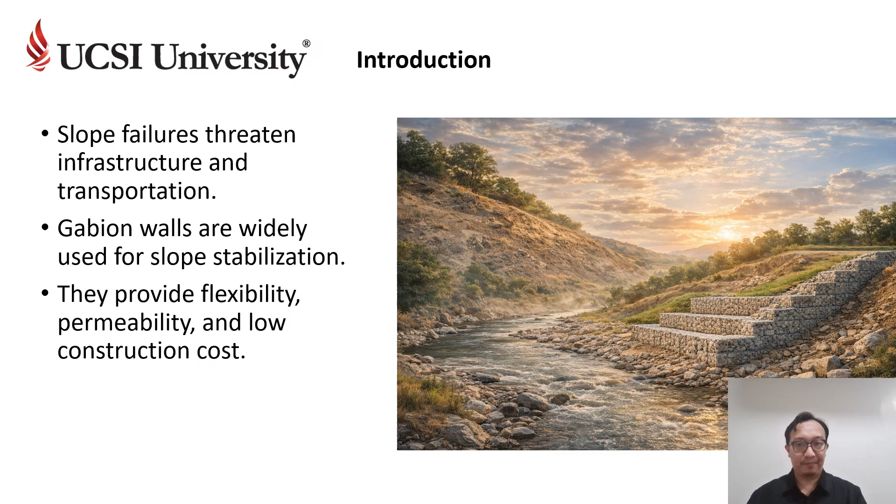Let's go a little bit further about what factors affect slope stability. Basically, slope stability can be affected due to natural factors. Number one, soil types. Each soil type can produce what we say is strength. Different soil, different strength - different types of soil composition can produce different strength. So by understanding the composition of the soil component itself, whether it's the percentage of sand, silt, clay, and gravel, we can know the strength and stability of the slope.

That's number one. Number two, the component of the slope itself might contain rocks. If the rock has high fracture, it can potentially reduce the strength of the slope. If the rock has high quality, high strength, that could also strengthen the slope itself.

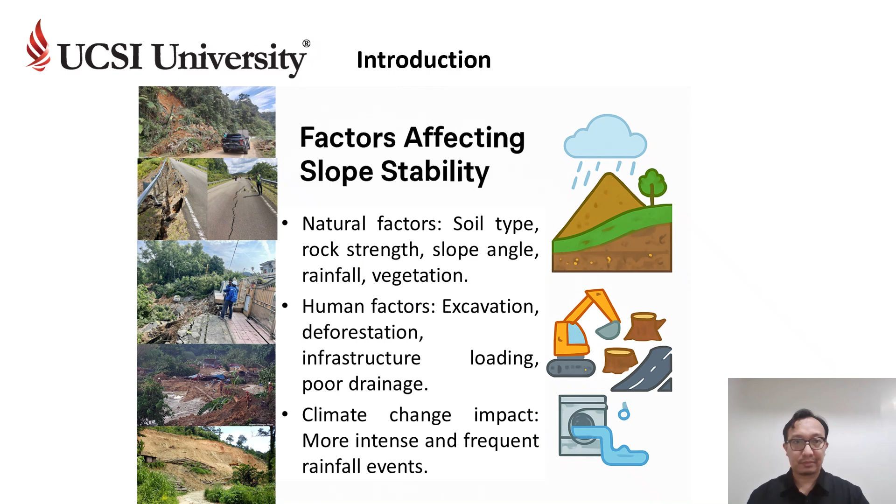So in this study, there are four objectives that I'm going to list out here. Number one, of course, when we conduct the study about slope stability, what we look into is to evaluate the factor of safety where we do the analysis based on the gabion walls.

Number two is to assess the effect of material type. Basically in this study, we are using three to four types of material, fill material for the gabion wall, to look at whether the factor of safety is high or low.

And number three, to assess the saturation condition, also based on the wall geometry. And of course, in this objective, we are using the Morgenstern-Price limit equilibrium method to assess the stability of the slope. Why am I using Morgenstern-Price?

Basically, it is one of the most common approaches for the design. Instead of Bishop - Bishop is also one of the methods that can be used to assess the stability of the slope - however, Morgenstern-Price is also one of the most commonly used methods. I hope the viewers can take this as part of their knowledge, so that maybe you can utilize this method for slope stability analysis.

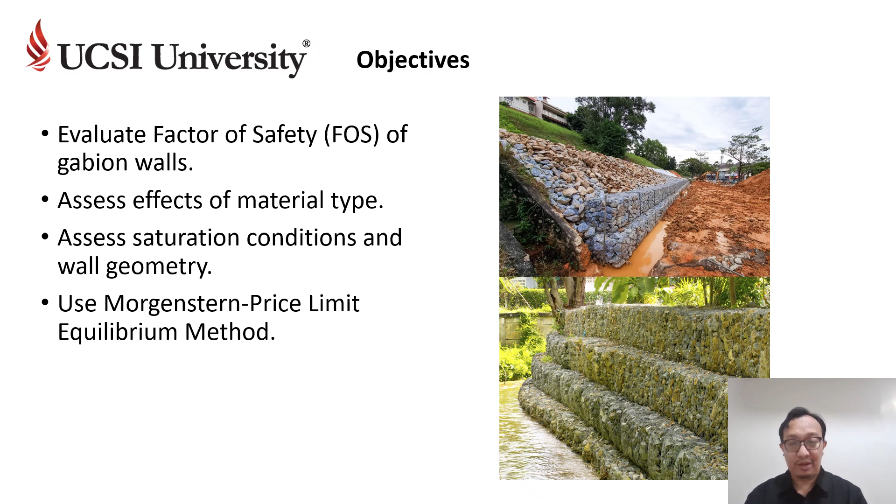Let me explain about the Gabion walls and why we focus this study on them. Number one, one of the purposes is to stabilize slopes and prevent erosion, and also to reduce landslides in loose or unstable soil, so that it can protect infrastructures, especially in urban areas, and prevent erosion, especially for stream banks. The function of the Gabion wall is a wire mesh cage filled with rocks that allows water to pass through, reducing hydrostatic pressure and improving slope stability.

If you're familiar with the Gabion wall, you can see that most of them are normally constructed on the riverbank or stream, since we know the function of the Gabion wall is to allow water to pass through and reduce hydrostatic pressure. That's why we can see many Gabion walls constructed in the area of the riverbank or stream bank.

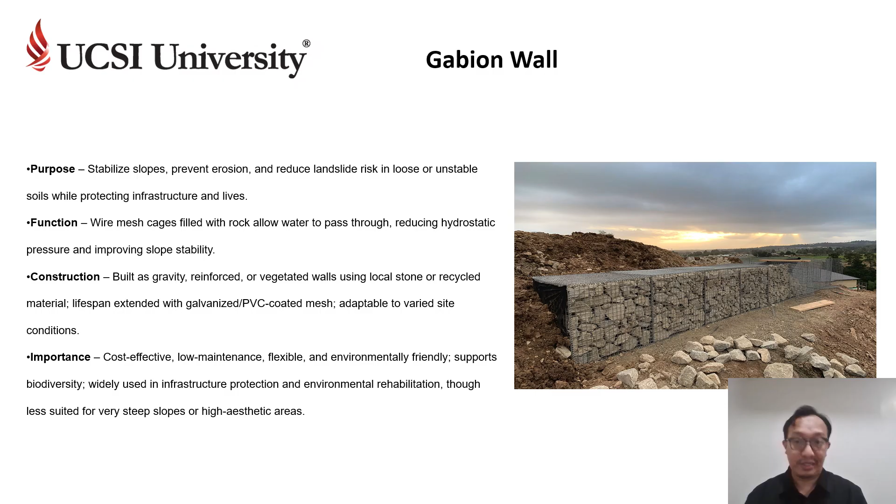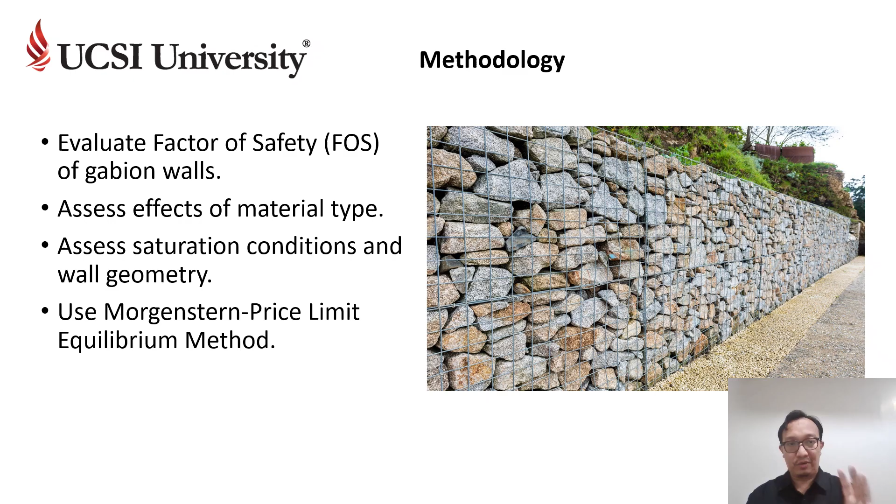In this study, what we do is evaluate the factor of safety. We assess the saturation condition, assess the effect of material type, and use the Morgenstern-Price method. Like I mentioned earlier in the objectives, we focus on these four processes.

Behind the Gabion wall, you must have what we call the backfill. For the backfill, for the bottom material, we are using soil properties with unit weight 15 kilonewton, cohesion 4 kilonewton, and friction angle 12 degrees.

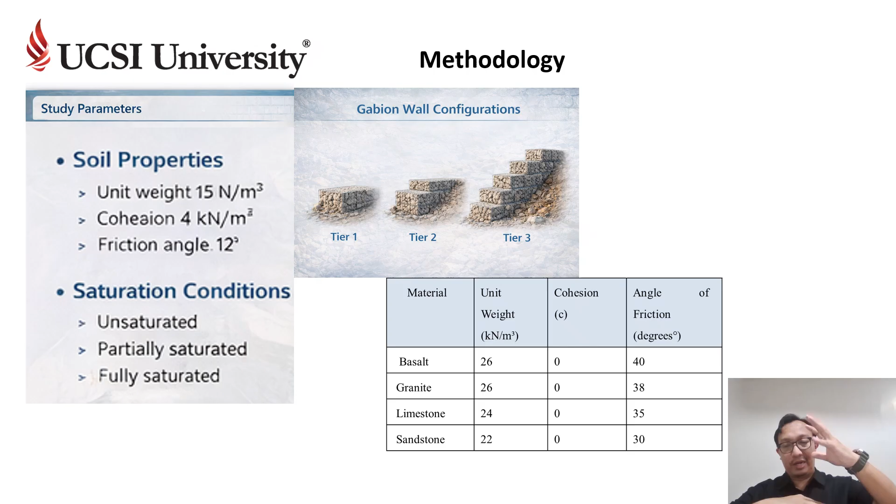We evaluate the Gabion wall configuration, having 1 tier, 2 tiers, and 3 tiers. These tiers mean the stack of Gabion cages. In one case, you put one cage, we call it tier 1. You put a second cage, we call it 2 tiers.

Another case is 3 tiers, but we can play around with the configuration. Maybe 2 tiers with 2 cages and 1 on top, or maybe 3 cages, 2 tiers, another 2 on top, and then another 1 to make it 3 tiers. This is the wall configuration that we focus on.

We also look at whether the Gabion wall is stable under unsaturated conditions, where the water table is below the ground; partially saturated, where the water is maybe half or a quarter of the Gabion wall height; and fully saturated, where the water table is high.

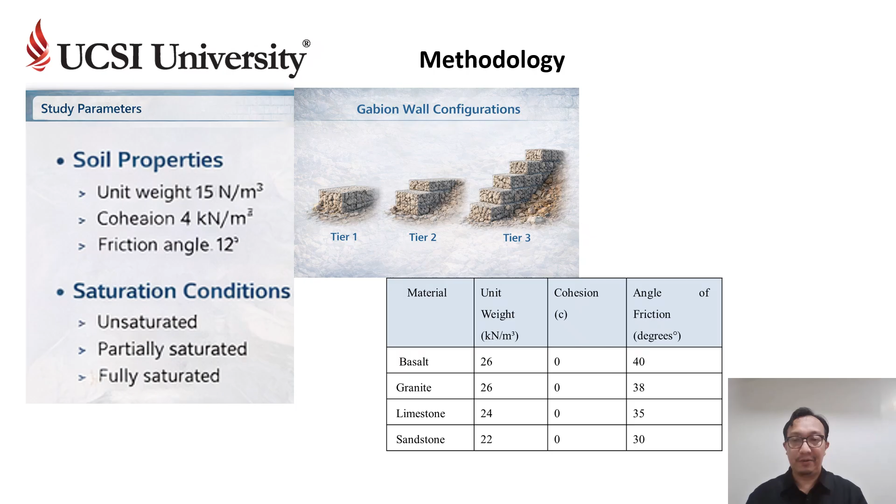For the fill material, we are using basalt, granite, limestone, and sandstone, with the unit weight, cohesion, and friction angle as listed in this slide. We try to evaluate which types of rock can provide more stable, more efficient, and more effective results for Gabion wall stability.

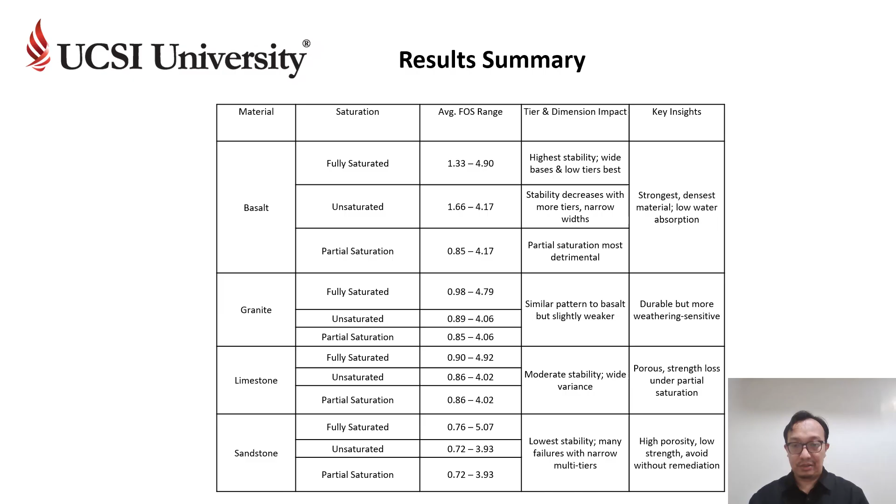This is the effect of material critical values, where this critical value sets the condition of the gabion walls. Please bear in mind these critical values basically focus on where the factor of safety is below 1 under any condition.

For example, maybe the tiers, maybe the saturation condition. So what we want to focus on are the most critical values that we can look into, those having the FOS lower than 1.

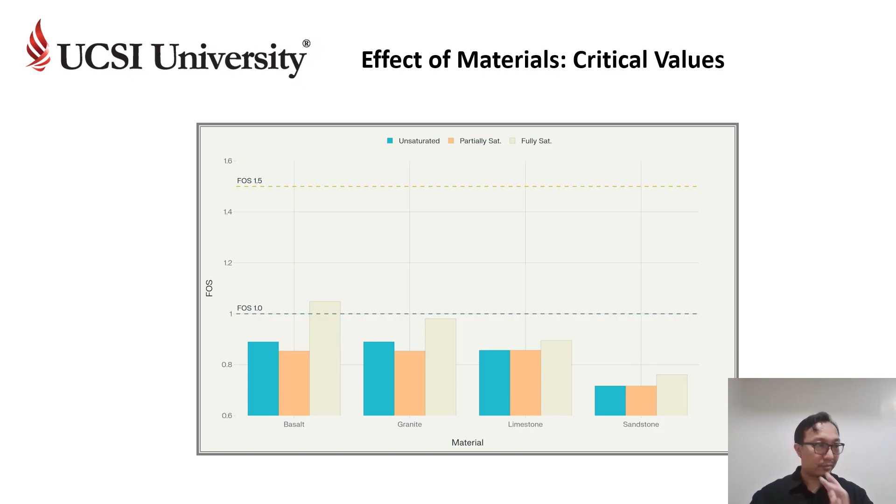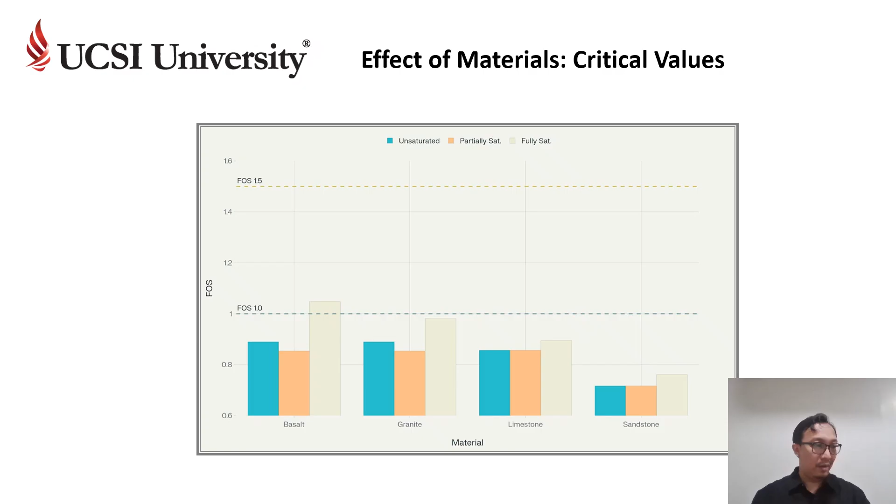Among these, we can see that basalt can be chosen as the gabion material for its superior critical performance. Granite provides acceptable performance with an appropriate design margin, while limestone may be acceptable with enhanced drainage and monitoring. However, sandstone should be avoided unless extensive remedial work or measures are implemented.

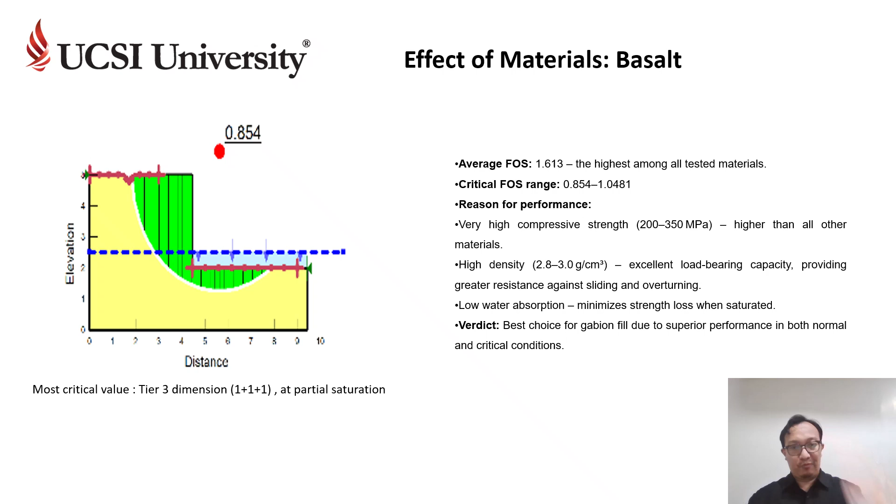This is the effect of material basalt, especially under critical condition. The reason for its performance is very high compressive strength. This critical case was evaluated under tier 3 dimension, which is 1 plus 1 plus 1, under partial saturation.

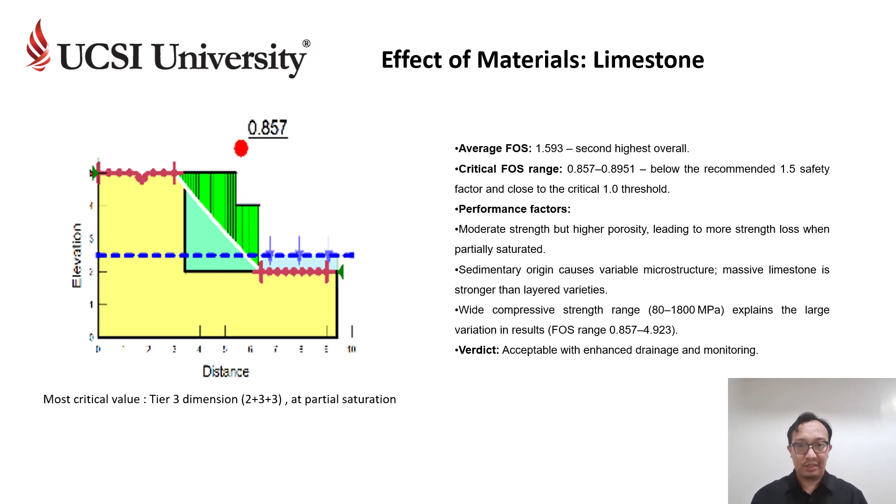And the effect of material limestone, under tier 3 dimension, 2 plus 3 plus 3, under partial saturation, the factor of safety of this gabion was 0.857. For tier 3 dimension under granite condition, using granite fill material, it is 0.854.

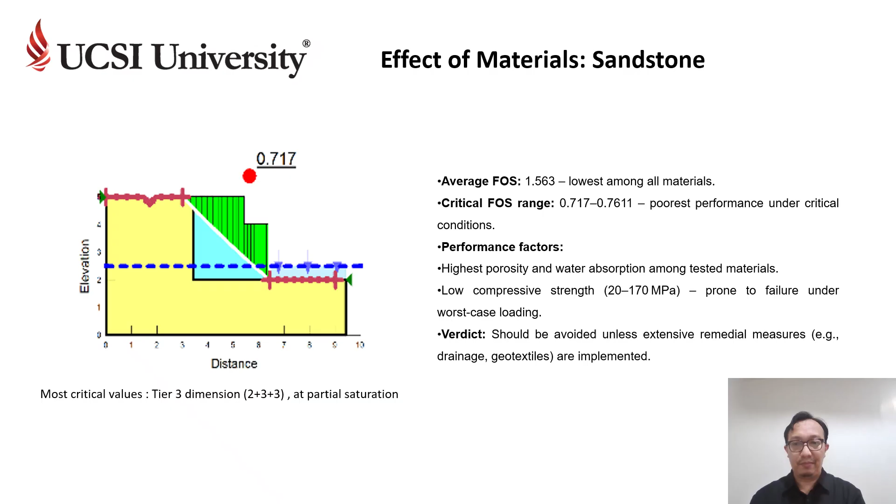And for the sandstone effects, at the tier 3 dimension, it's 0.717. The factor of safety shows that this condition was critical under the 3-tier dimension, under partial saturation.

So looking into the saturation effects: unsaturated, moderate FOS was found between 1.45 to 1.553. Partial saturation gives the lowest FOS, between 1.38 to 1.445, because of positive pore water pressures developed during wetting, reducing effective stress.

With full saturation, we found the FOS is quite higher, one of the highest, 1.8 to 1.861, because the hydrostatic pressure provides uniform lateral confinement, and water flow through the permeable gabion enhances particle interlocking and effective stress.

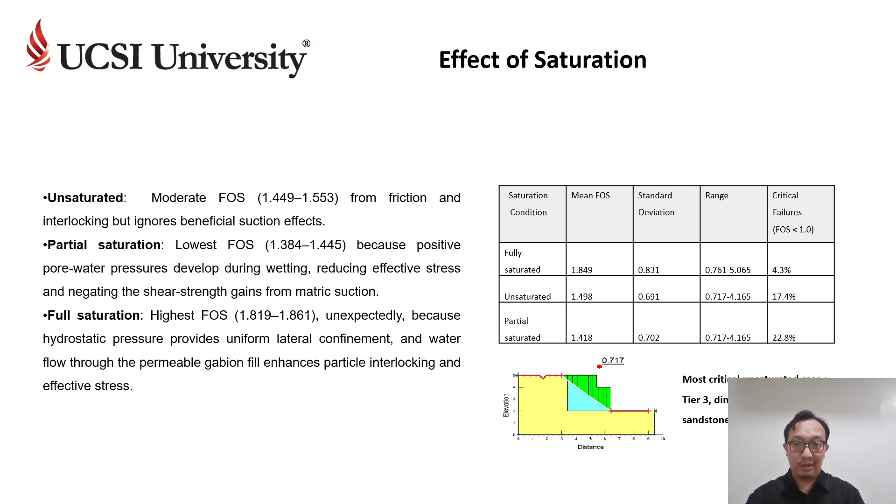So that's why we know the application of gabion walls is good for protecting the river bank or stream bank. This is the effect of the tiers and dimension.

Looking at the number of tiers, sometimes it can reduce the stability of the FOS because of the center of gravity itself. As the stack increases, the stability might lead to overturning or sliding.

This allows for deeper slip surfaces, and sometimes increasing the base width strongly improves stability if we have a good enough base as well as fill material, by lowering the center of gravity, increasing frictional resistance, and lengthening the slip path.

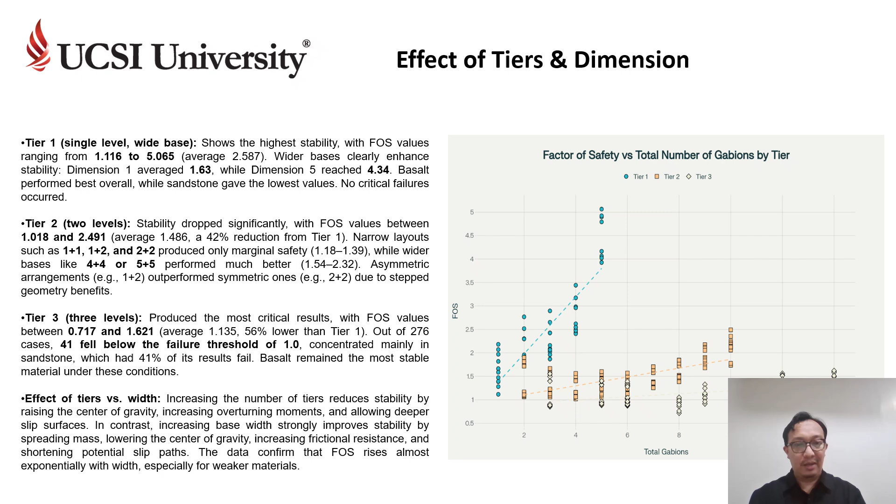The data confirm that FOS rises almost exponentially with width, actually, and with weaker material. So as far as the conclusion for this study, we found the best stability is found in a wide base, single tier, with good material and good drainage.

However, narrowing the wall configuration and having multi-tier walls can reduce the factor of safety. But we know that under full drainage, it could potentially improve the factor of safety to more than 1.85, because of the reducing hydrostatic pressure.

We also conclude that material selection strongly influences the stability of the gabion wall, and geometry and tier configuration are critical design factors. This can help optimize the gabion wall design in order to stabilize the slope.